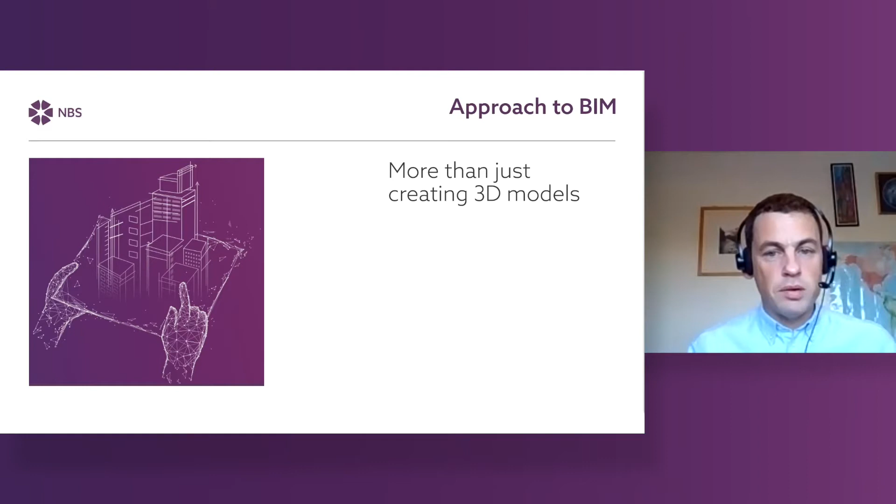But when we ask a bit more about what people see their BIM approach as being and ask them to describe that, then we would say, as the BIM standards would say, it's much more than just creating 3D models. If we look at the question about this, we can see that there are some who describe their approach as being about creating 3D models, 29%.

However, almost 2/3 see BIM as a process, a standardized process for managing information as set out in either the BS PAS 1192 series, the BIM level 2, if you like, or the ISO 19650 series, the international standards. So it's encouraging that more people see BIM as an information management process than as simply creating 3D models using the various platforms that are out there.

And in the UK, this is higher. So 41% describe their approach as following BS PAS 1192 series, and 33% the ISO 19650 series.

So there are a number of tasks that should be carried out or documents produced to align with the BIM process as set out in ISO 19650. The number of respondents involved with these is almost unchanged when compared with 2020. So some of these things do appear to be commonplace, that there's a majority of people that are talking about either creating them or doing them themselves or being involved with them in some way, working with others. So things like the creation of BIM execution plans, where 63% talk about being involved with those on a project, and the sharing of information via common data environments, 60%.

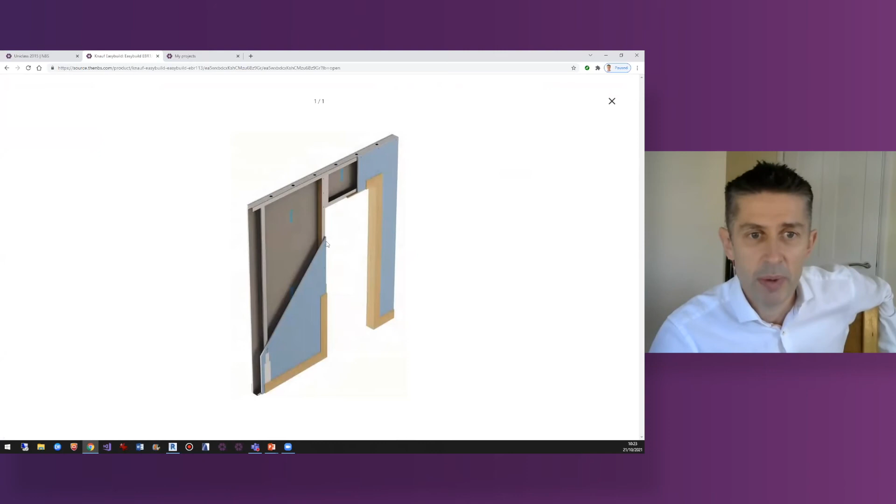And that's the sort of level above a product. So you can imagine a system that's made up of a number of products. And if I just jump down the page here, you see the primary classification system, and then where it's positioned in the Chorus content. And when you start going down to the technical information this time, you can see the different products that can come together: lining products, framing products, sealing products, to produce that final system.

And all of the information that you see here in NBS Source is also positioned against our generic content in NBS Chorus. So this is our specification platform, NBS Chorus, where again, you're modeling information. There's not big pictures of 3D models here, but it's about information and management. So if I jump across into this project, you can structure all of the prelims. So from the start of the project all the way through to asset management at the end. That's done with the PM codes, the project management tables.

And if I come to the technical spec here, you can see, again, plain language first, and then the codes here to group similar items together. So 2 handrail systems in this spec. If I want to come and add new content, like say low temperature hot water heating system here, as I add that to the job, let's add another one as well. I'll add the partition example, so let's put that gypsum board partition system, exactly the same classification code. It allows the specifier to specify everything from a description of the system to the performance of the system, down to the products and the workmanship surrounding the installation.

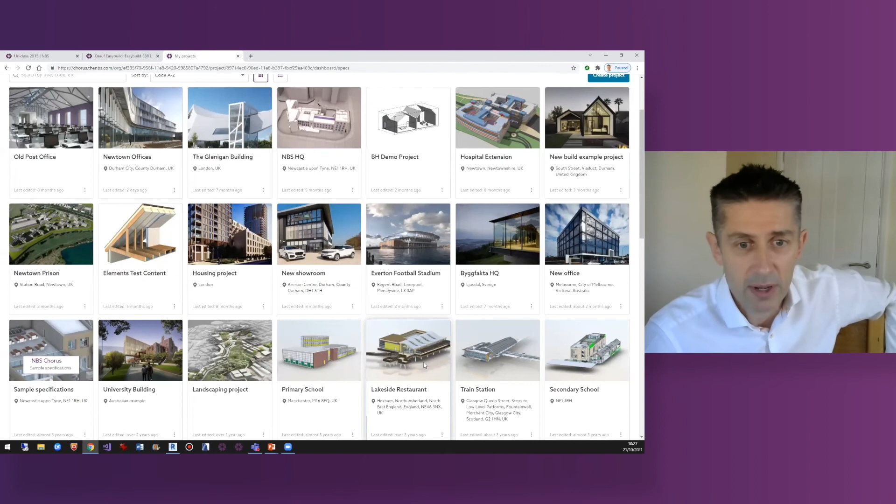In terms of analyzing that, you can come to a project that's got lots of content in, for example, here. And you can filter by the codes on the right-hand side here to see similar things together. So for example, here, there's the different wall lining systems, which are SS2525.

Okay, the next part of the presentation, we look at information management. And in terms of information management, looking at the 19650 series of standards, just again, reflecting back on David's presentation, really doing that deep dive inside of what is a BIM project. When you're sharing information, are you using a naming convention? Are you clearly saying what it's suitable for? Is there that audit trail with revision information, etc.? And you can see that that's starting to get used in the UK more and more.

So jumping across to NBS again and saying how we fit, obviously when sharing information like drawings and schedules from the 3D modeling environment, you follow the 19650 process. It's also possible to do that when you're publishing your specification information.

So jumping back to that same project here, it's possible to keep a record of all of the specifications published from Chorus, which are probably then put in the common data environment. So if we have a little look here, you can see that earlier today, my colleague Kate published, as an architect, the specification on this particular project from this company, the handrail package, and it's clearly got what its status code is and what its revision is.

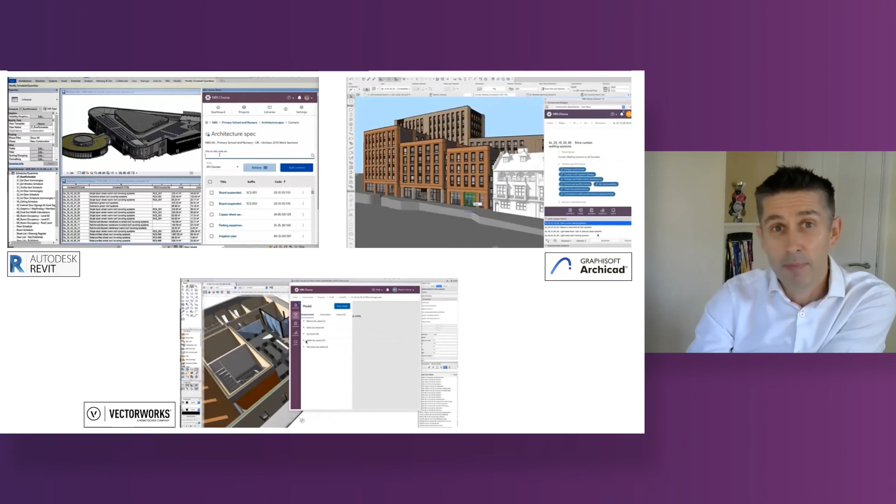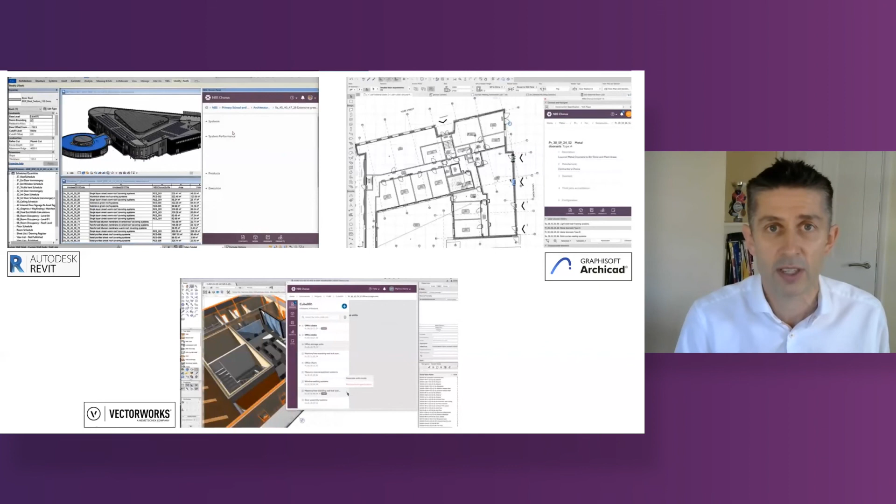So the third part of how NBS is integrated into the BIM process here is around coordinated project information. So I said I wouldn't show any 3D models for the first 2/3, but here's a few 3D models on the screen here. We've got plugins for all of the leading design software, so Revit, ArchiCAD, Vectorworks, and it's the same plugin in terms of functionality for all of the packages, whether you're on a PC or a Mac. And that's allowing you to link the model with the specification, and then inside the model, link those objects with the specification clauses, coordinate the classifications on your annotations, and make sure that design matches the specification. So everything's coordinated and nice and clear for the project team that receives that documentation.

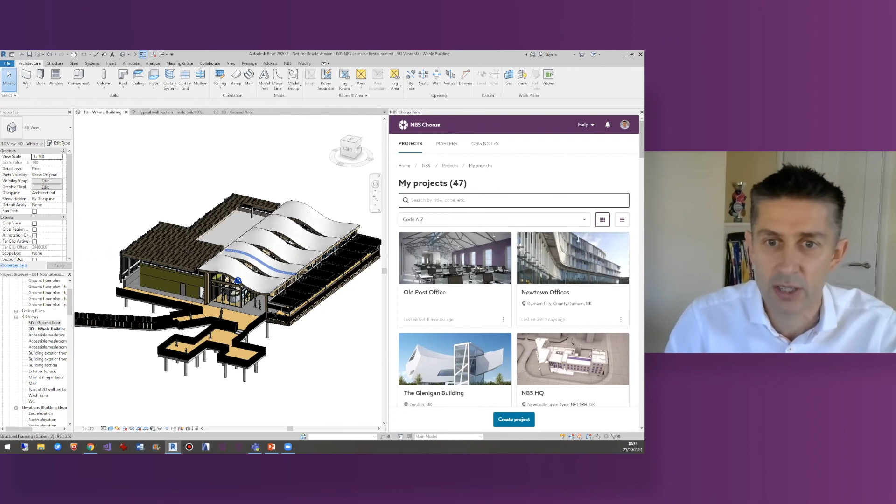So let's do a live demonstration of that. So what you can see on the screen here is the Autodesk Revit package, and we have a 3D digital model on the left-hand side. And this model here is linked to a specification in Chorus. And you can see this is the Chorus panel inside of Revit, exactly the same projects we've just been looking at. I'm going to come and find the linked specification, which is this one. You see the little icon there, which says I've previously linked the two together.

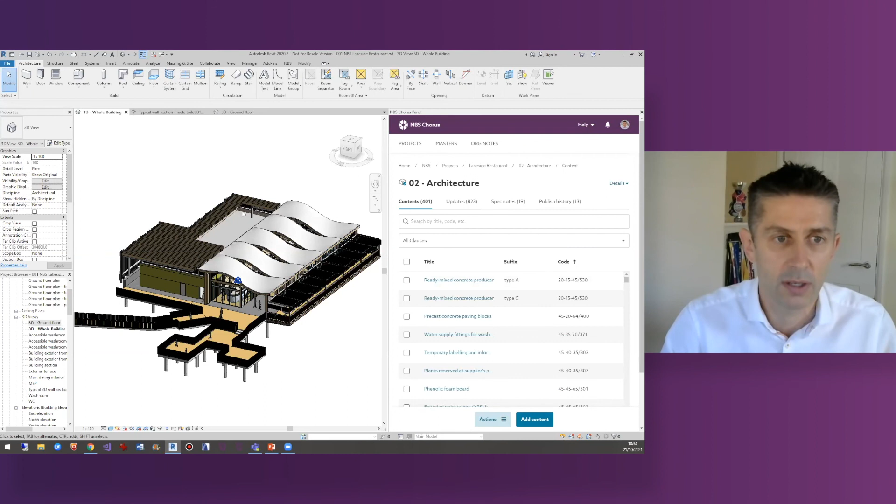And then inside here are the various systems and products which are linked to the equivalent object here. So if I click on the flat roof of the building, I can come now and see, if I've got permissions, I can actually work on the specification as I'm doing the design. Similar thing here for this curved roof, a stainless steel roof covering system.

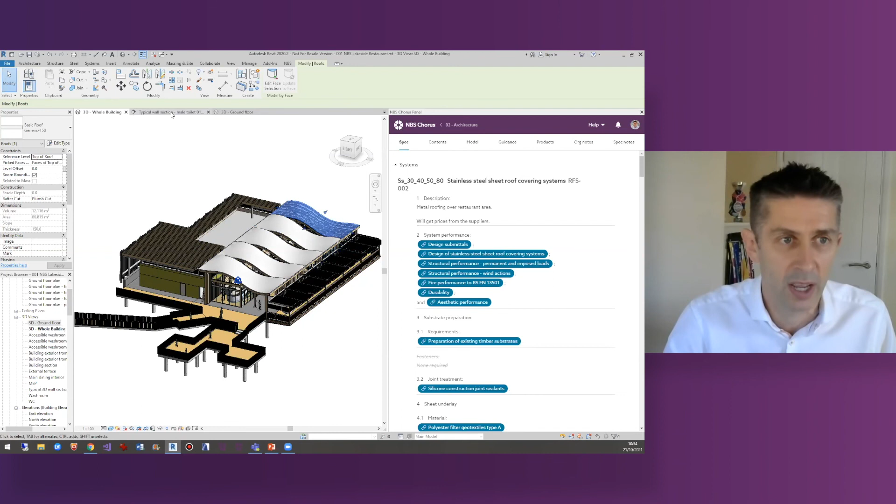So you've got that nice sort of one-to-one link between the system, like with say a layered object here, the materials and the products, or if you've got any sort of families to the products or system, whichever is relevant. That makes annotation a much better process.

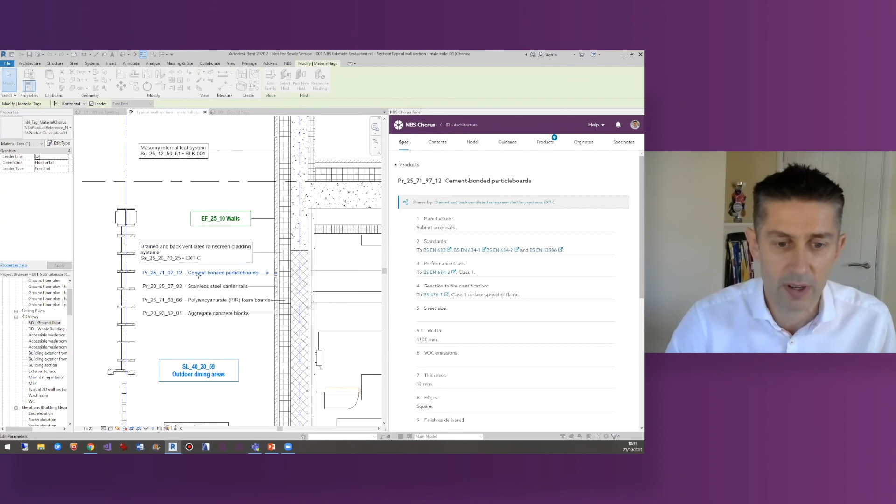So I'll come through here, and as you click on the external cladding system here, you can see that the system itself is linked, as are the various products inside there. And these codes that you see in the spec are the same ones that are used, if I just pull that on screen, inside the objects themselves. So really lightweight linkage, so you can write your specification externally in the Chorus cloud environment, but have all of these synchronized annotations that you can use in your shared tools, using your callouts inside the model here.

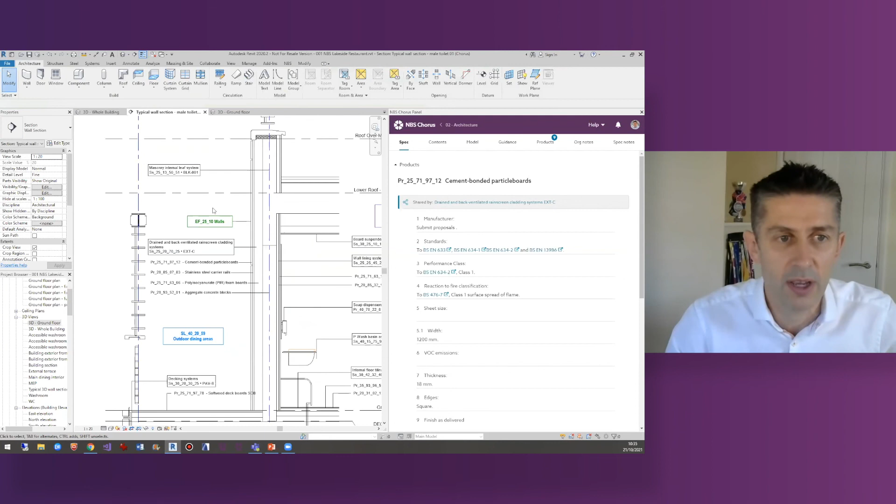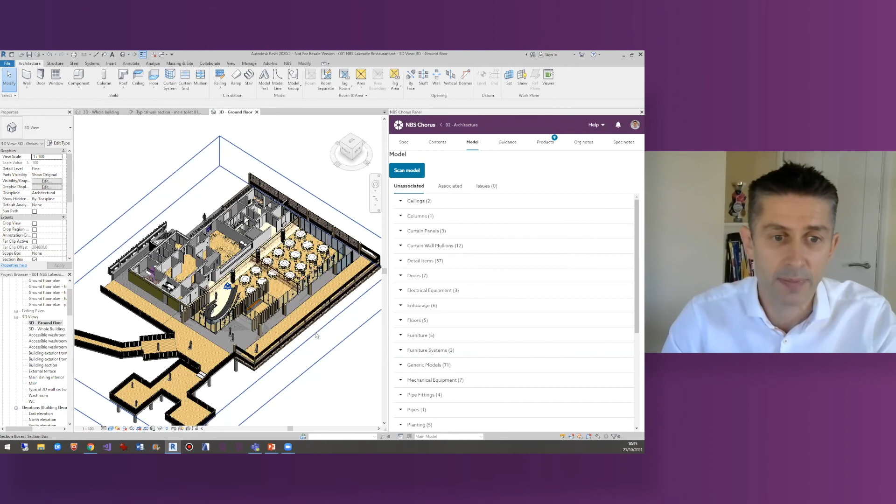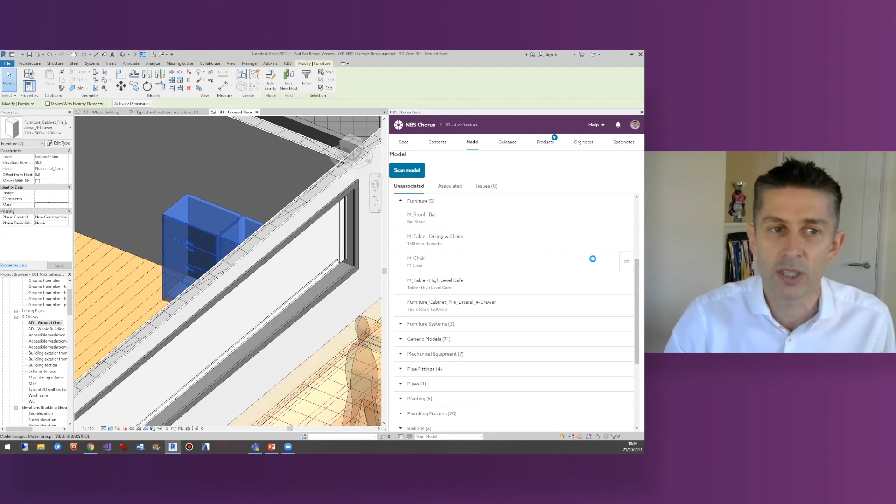And we have this nice little button here, model report. What this does is report on everything that hasn't been linked to the spec yet, everything that has, and then any issues that might come up. So just to demonstrate, if I want to say, what have I not linked to the spec, or what have I not added to the spec yet? I can come through here and just say, show me the furniture. And as I click through here, the NBS report is driving the model. So I can have a look at all of the items I haven't yet specified and decide whether I want to add those to the spec, or maybe leave them because it's somebody else's design responsibility.

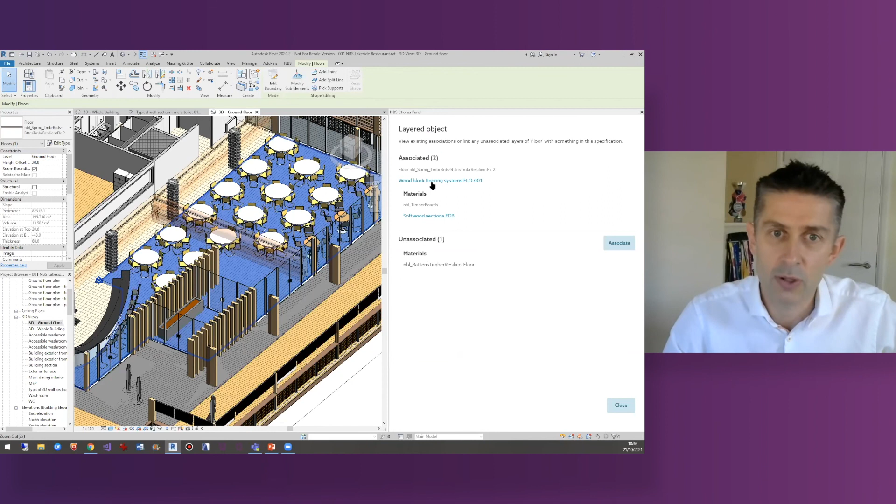Where things have been linked together, like what we saw in the annotations, you can very quickly jump to that specification. So for example, the woodblock flooring here, when I click to look at that, it highlights it there in the model, but also jumps to it in the specification, so you can very quickly see it and, if necessary, modify it or make notes against it, etc.

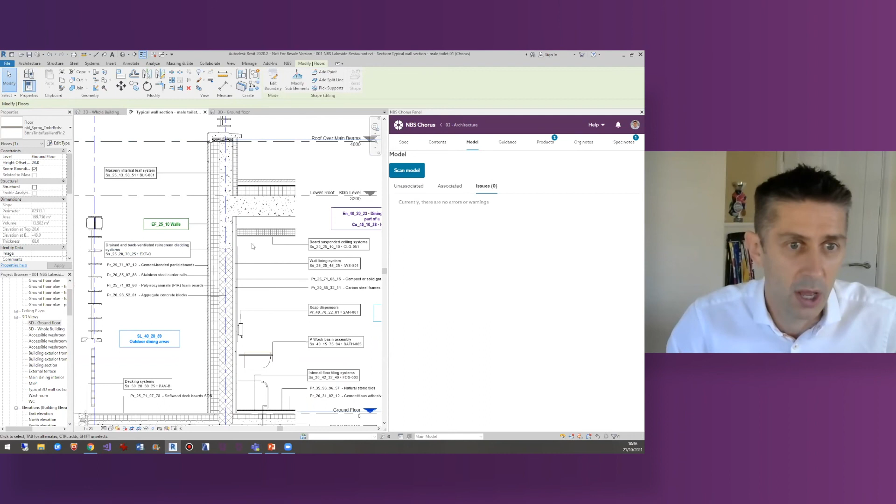And the last thing to note here is the issues report. It's telling me everything's linked really nicely, but if I was going to go and break something, let's just have a look. This ceiling system is currently CLG 051 board suspended ceiling system. Let's just go and find that. I'm going to deliberately make this uncoordinated. I'm just going to call it washroom ceiling, don't spell it correctly, and I'll call it 101. So we've got a problem now because the printed PDF is going to be talking about a washroom ceiling 101, whereas in the drawing, maybe the quantity takeoff is going to be talking about CLG 51 board suspended.

But if we go here and look at that model report one last time, where we come across to the issues it's giving a warning saying that the ceiling system now doesn't match. And we've got a little button here, you can just click fix all. And if you look on the left-hand side there, it brings it back in sync and tells you there's no problems.

So quick three-part presentation there, just looking at how NBS can help you with your BIM process. The BIM process is much more than just the 3D modeling side. So just a summary in terms of what we've seen today. We've had a presentation from my colleague David looking at the digital construction report.